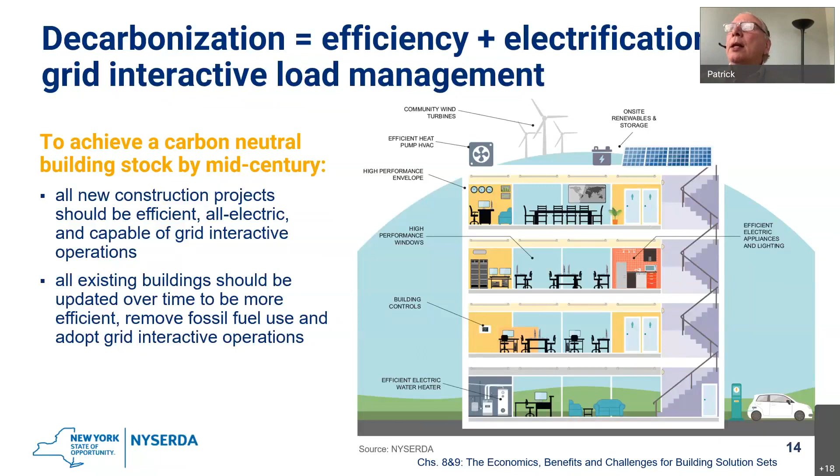Co-benefits, next please. I just want to run through some of the co-benefits of carbon neutral buildings here. Six key non-energy benefits, and I want to make a specific point on a few of them. Number one, you're able to future-proof your building. Your building would be safe against the changing energy market and the expectation that fossil fuels will become less accessible and more expensive over time.

Secondly, you can maximize usable square footage. The electric HVAC equipment generally takes a smaller footprint than existing fossil fuel HVAC equipment, and there are unitized solutions where you can combine multiple pieces of equipment into a unitized solution. Number 3, health benefits. We've mentioned some of the health benefits. There are studies going on right now that really show that these all-electric buildings are much better for people who have asthma and other related diseases.

Increased resilience. Weatherization plus solar and storage helps keep the power on and temperatures consistent in the event of a power outage or extreme weather event. Occupant comfort. High-performing building envelopes combined with engineered ventilation systems provide much more comfort than a typical building in New York State at this time. And safety. Reduced risks associated with the aging gas infrastructure. Open flames are eliminated with induction cooktops, and all in all, a large number of co-benefits. Next.

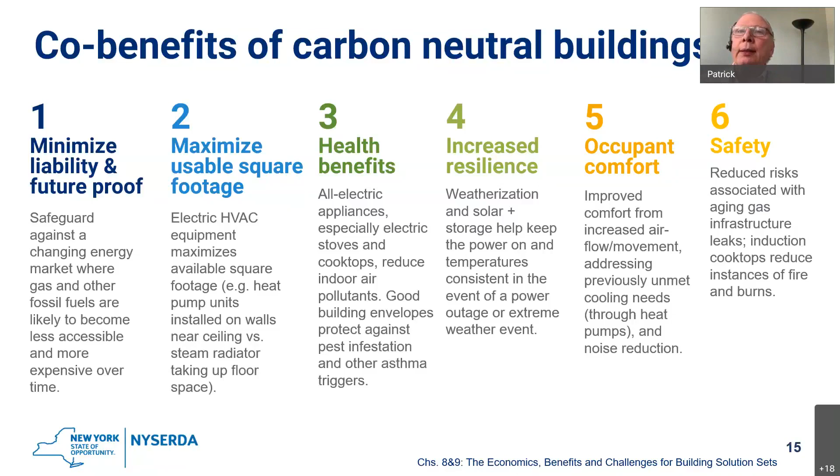There are some challenges. There still is a first cost premium compared to fossil-based fuel systems and a high cost of envelope upgrades.

Challenge number 2, cost of fuels is still an issue: the relative high cost of electricity versus the low cost of fossil fuels.

Despite the rest of the challenges noted below, the cost data that we've modeled has been exceeded in the actual marketplace, and I'll show that later in the demonstration. We've been sponsoring a Buildings of Excellence competition for a couple of years, and experienced design and construction teams are beating these cost estimates. But challenges still remain.

One of the biggest challenges is to get New Yorkers to invest in their buildings at a level that they're not typically doing. That'll be part of improving the building stock overall.

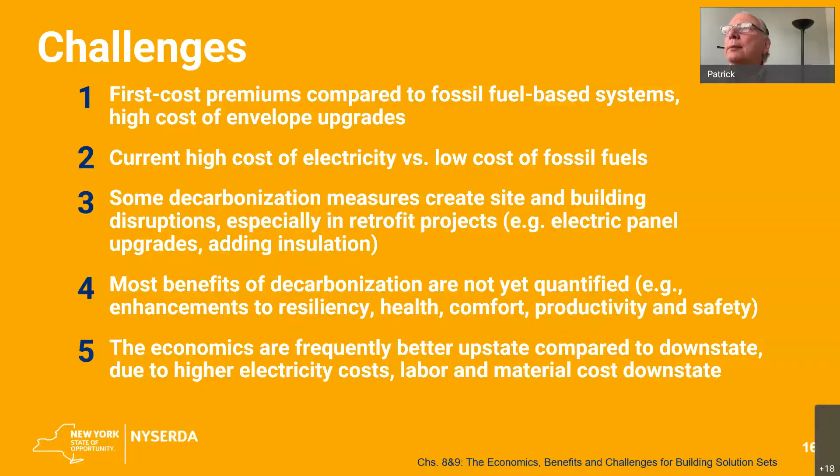Managing costs for carbon neutral solutions is critical, and we have multiple pathways that we are supporting to try to drive down cost.

The most effective way to reduce costs in new construction and gut rehab is by using an integrated design process with an experienced team, as well as ensuring pre-allocated design construction budgets to focus on right-sizing systems and minimizing material use. Costs are coming down rapidly, and advanced design teams are starting to report that they can deliver projects close to or with no incremental cost.

Some of the concepts used in other industries are just beginning to be applied to the construction industry: prefabricated panel solutions, economies of scale, and the establishment of a dedicated supply chain to support that. Improved familiarity with these systems can reduce the on-site installation costs and the time on site, which has a major benefit in terms of construction.

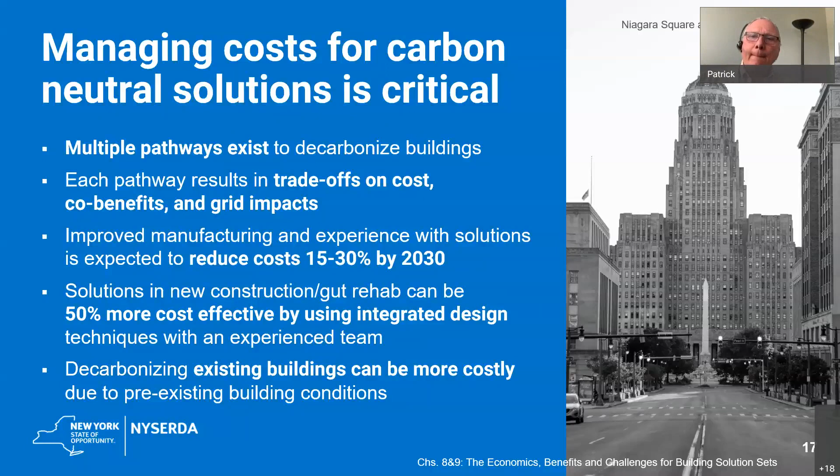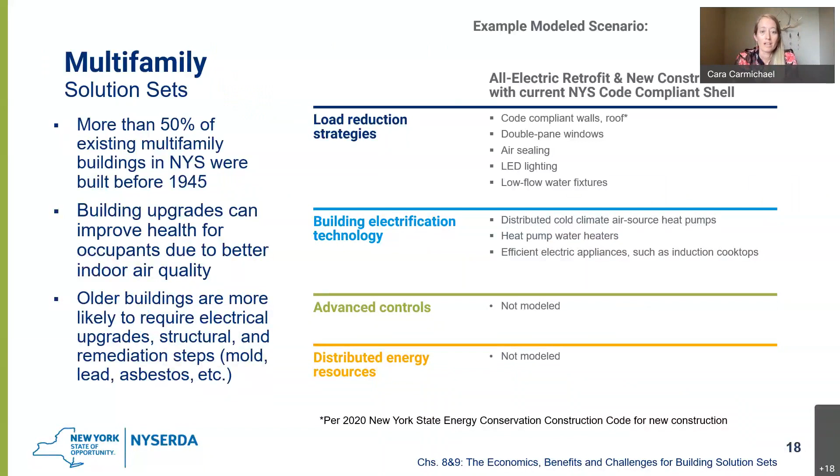We'll dive into the costs for the 4 key building types in the next several slides, starting with multifamily. For multifamily buildings, we evaluated an all-electric efficient scenario for both new construction and retrofits with gas and oil baselines. The multifamily building stock in New York is particularly challenging since most of it was built before 1945, and so naturally it has deferred maintenance that also needs to be addressed. But obviously this is a very important sector since it's home to millions of New Yorkers.

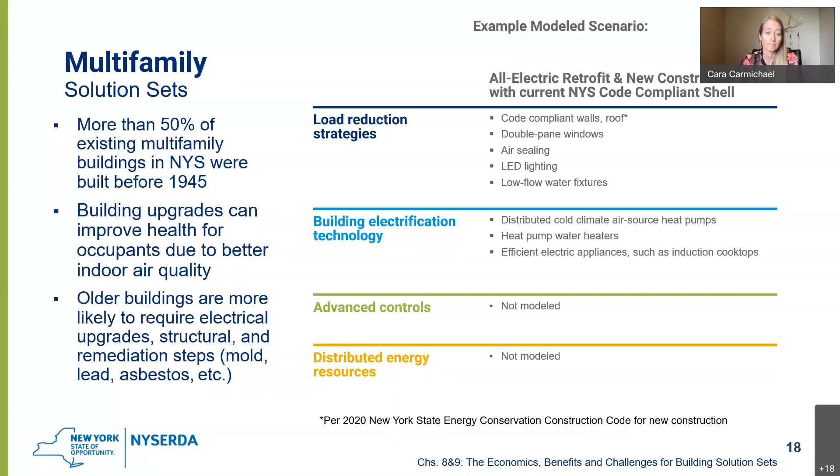Our analysis found that decarbonizing existing multifamily buildings that currently use oil to provide heat provides better paybacks than those that are heated with gas. So what we're looking at here is a 7-story retrofit downstate with a cold climate air source heat pump, a code compliant shell, a heat pump water heater, and efficient appliances.

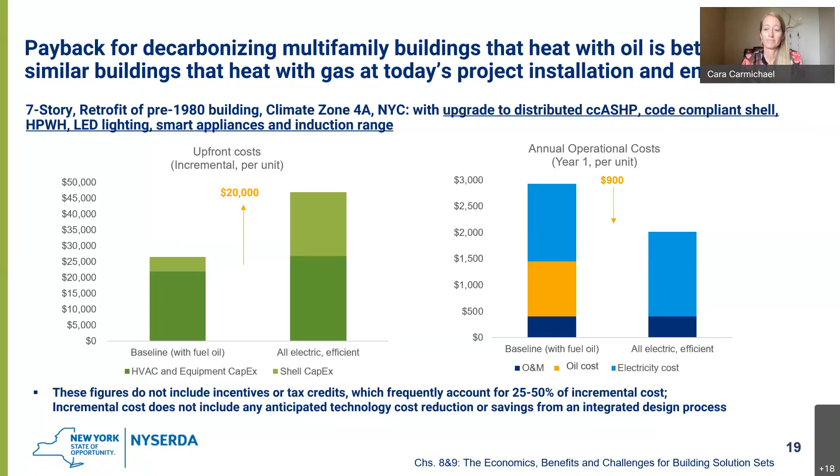In this scenario, with a multifamily building that heats with gas, our modeling shows that these are not attractive economically based on today's costs.

This does reinforce the importance of reducing upfront costs through technology cost reduction, like Patrick mentioned, and we discussed a little bit yesterday. And lastly, you'll hear it a few times today, but accounting for the co-benefits like health and comfort and resilience and the grid benefits is really critical. Again, health advantages are especially important with family members with respiratory issues, including asthma and allergies, and the societal healthcare costs due in part to our buildings impacts us all.

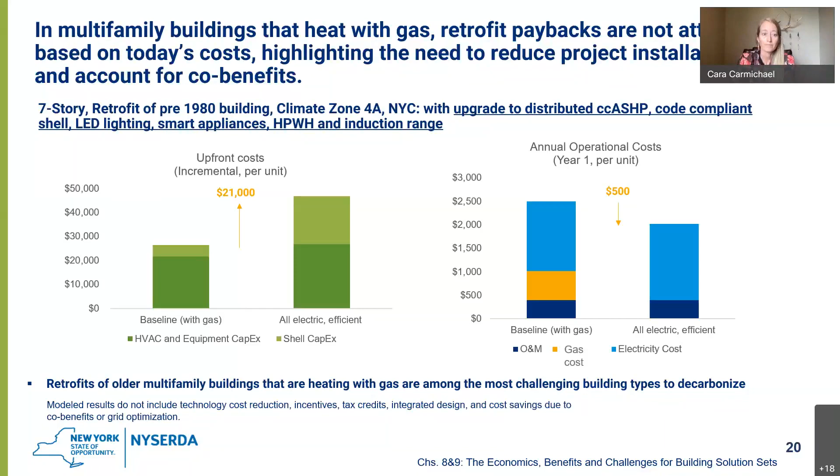As we have discussed throughout the roadmap presentation, new construction and gut rehab projects will have some of the best economics. This example is an efficient all-electric new construction scenario with a code-compliant shell, and upfront costs are nearing parity with conventional gas construction. We found only a small premium of about $2,000 per unit before incentives. This upgrade does increase operating costs, but just by a little bit. Overall, this is really good news for new construction multifamily decarbonization.

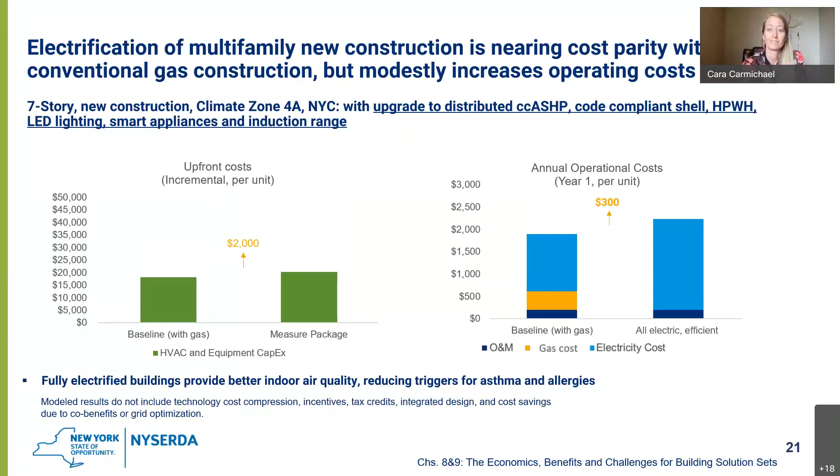Let me briefly explain the data in the slide you're looking at. We're showing the incremental cost as a percentage, both before tax credits and incentives—that's the current full cost—and then the incremental cost after available tax credits and incentives, shown in the lighter blue.

The data represented here comes from 2 rounds of the Buildings of Excellence competition that NYSERDA has been running. It includes low and mid-rise projects from upstate New York, and low, mid-rise, and 1 high-rise project from the New York City area. As you know, there's quite a difference in the type and cost of construction geographically within New York.

The great news is that a dozen of the projects have no incremental capital cost to build net zero and carbon neutral buildings. Last year's round of the competition, every building winner was an all-electric solution. That's just something to point out.

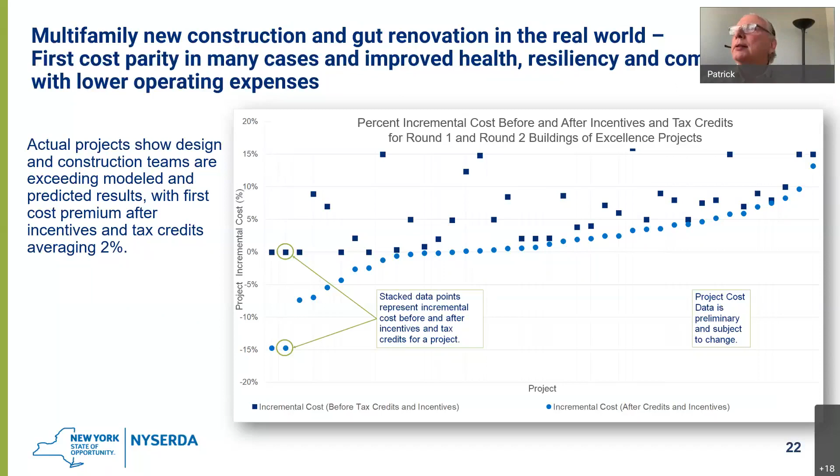With the Buildings of Excellence competition, in addition to the data, we get access to the design teams to understand the solutions they're applying that give them a combination of performance, carbon neutrality, and cost parity. One of the most important things is to begin early in the pre-schematic design phase, really looking at technical solution development and careful selection of the technologies deployed.

In addition to designing the building itself, it often takes designing how the building is constructed. This integrated design-build strategy is deployed by many of the teams. Notably, over half of the estimated project savings came from team and project design strategies, emphasizing the importance of a strong team that leverages integrative design. The buildings that achieved parity did not do so simply by putting more expensive equipment into a similar building design. I think that's important to note.

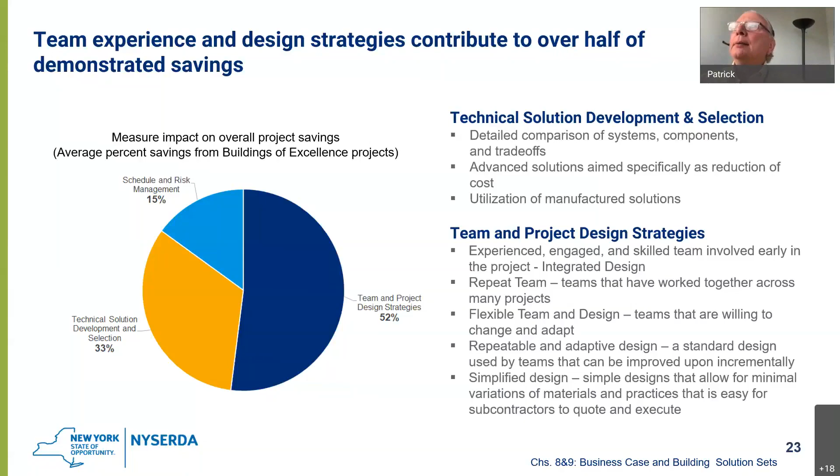There are many benefits to decarbonizing multifamily buildings, including improved health, comfort, resilience, safety, costs, and grid benefits. The biggest challenge with this building type will be decarbonizing existing multifamily buildings, in particular those using steam heating.

Also, some of the older building envelopes will be very expensive to upgrade and improve their performance. Another challenge we face in the multifamily sector, and in some aspects of the commercial sector, is the difference in incentives between landlords and tenants. When we have an owner-occupant or a homeowner, they share all the benefits of an investment into the building, but those benefits are split between landlords and tenants.

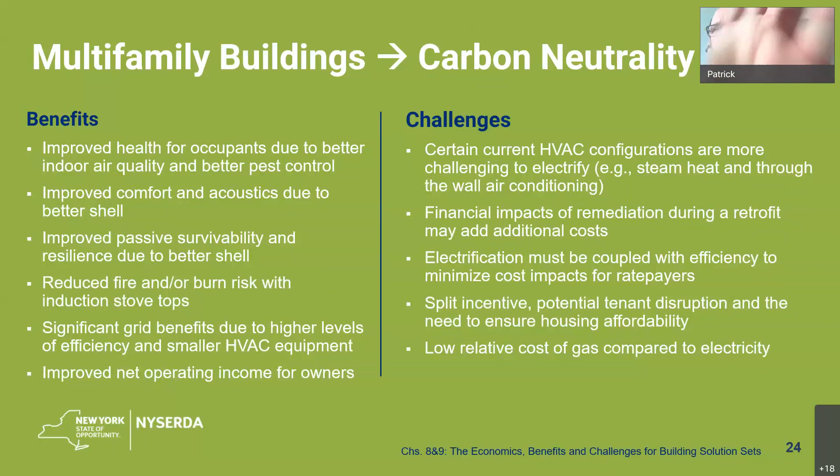The single-family home typology represents residential homes, duplexes, and townhomes that are common across New York. We'll look at 3 scenarios that include both air source heat pump and ground source heat pump technologies, and 2 levels of shell: a comfort shell and a more efficient code-compliant shell.

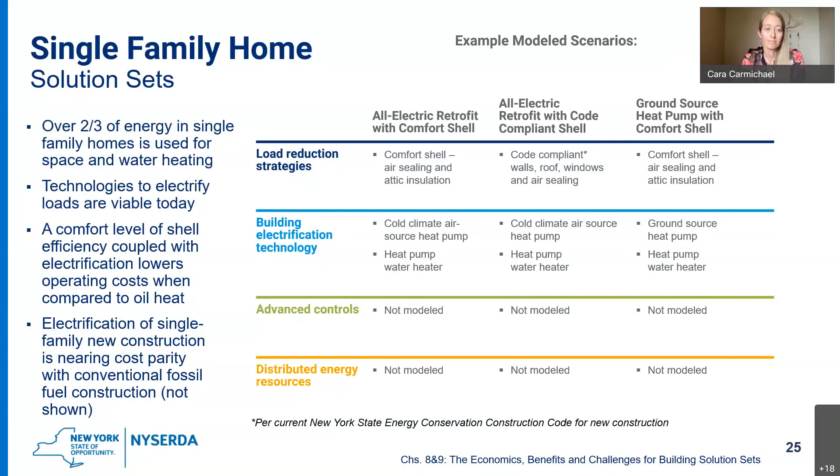Decarbonization retrofits of single-family homes with oil heat are often cost-effective today, even before incentives. We found that the average homeowner spends 10 years in their home, and the simple payback for this level of improvement falls under that threshold, making it a reasonable level of investment for most homeowners.

With the single-family home incentives available today, that could bring the simple payback down to 5 years. We found those incentives to be on the order of about $10,000. Lastly, this project will result in improved indoor air quality, better comfort, better resilience, and overall just a better place to live. If you're currently heating with oil, it's a very cost-effective upgrade.

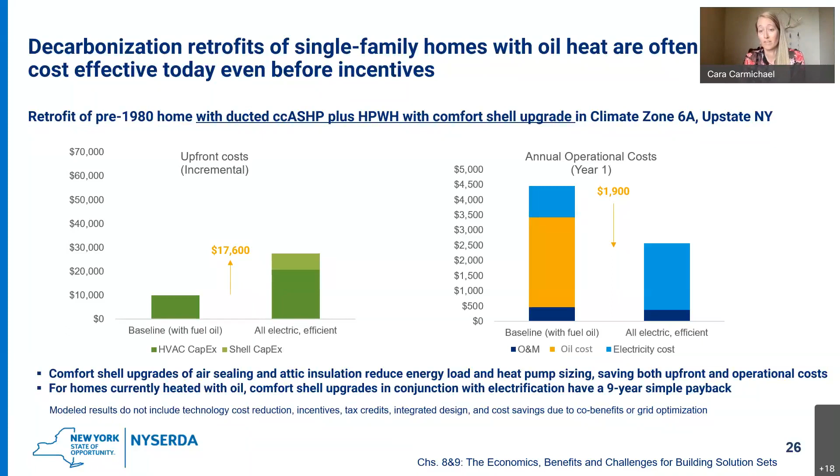There are 4 moving pieces that are not included in the economics shown here on the slide, but those will bring the cost down in the near term to help this scenario pencil. The first is incentives and tax credits, which, as we've discussed, could cut upfront costs in half. Second is the cost reduction of installed technologies, as Patrick mentioned and we discussed yesterday, installation, manufacturing, supply chain efficiencies. These we found range between 5 and 42% lower upfront costs for technologies by 2025.

The third piece is the increasing costs of energy, both gas and electricity, in the near future, which will make operational savings more valuable. And then the fourth, really important, is accounting for the co-benefits: health, comfort, resilience, grid benefits. These will all help make the business case. I would say it's also worth stressing that the economics are highly dependent on the existing conditions of the home.

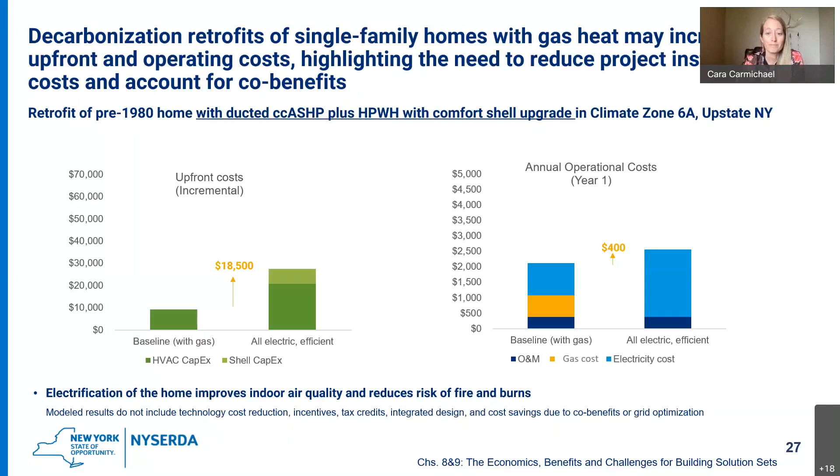As a result of this upgrade, the home will have superior indoor environmental quality. It'll have better comfort, better passive survivability, providing significant benefits to the family living there. One other really important dimension I want to highlight: with the deeper level of shell upgrades, this will reduce peak load on the grid, and this will also reduce grid build out, as Dan Ost presented yesterday.

This level of shell improvement would translate into a 50% reduction in peak load if the equivalent shell was rolled out across all homes, as compared to an electrified home with no shell upgrades. So the reduced capacity requirements on the grid will reduce grid system costs that are borne by all ratepayers, borne by you and me and all of us here today. Electrification and efficiency and shell measures are really important, not just at the building level, but also at the system level.

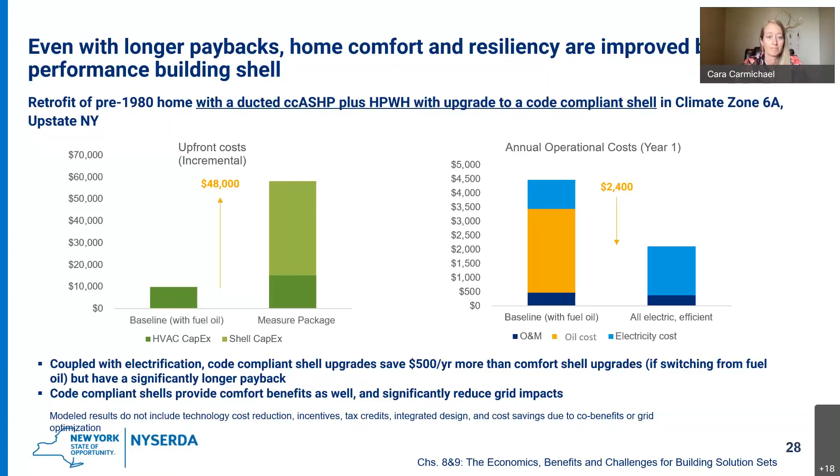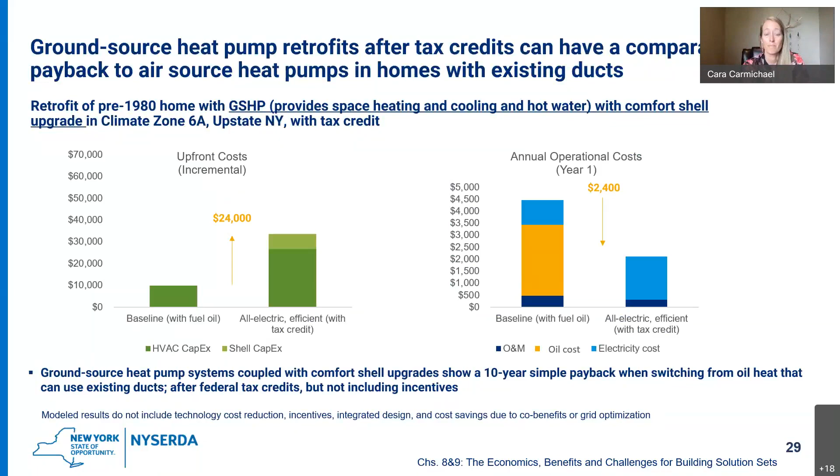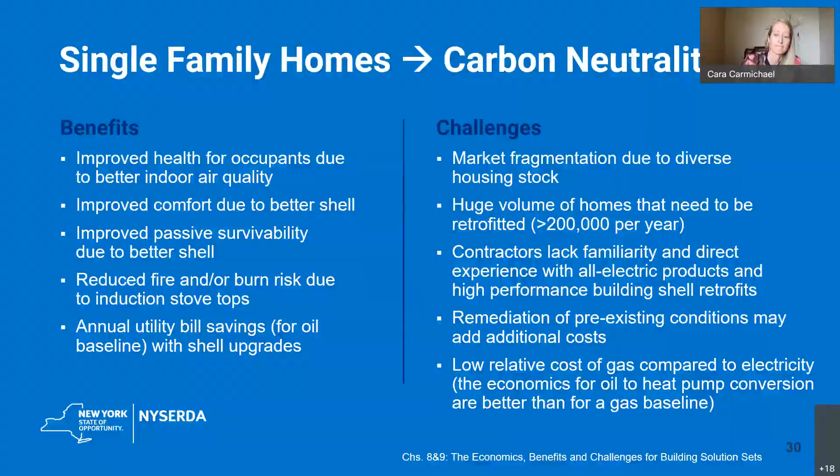The next set of slides, we're covering a few office use case cost scenarios, which apply to both leased and owner-occupied offices. We'll walk through two use cases, both retrofits: the first showing an all-electric upgrade with a code-level shell, and the second showing an all-electric upgrade with a passive house-inspired shell and advanced controls.

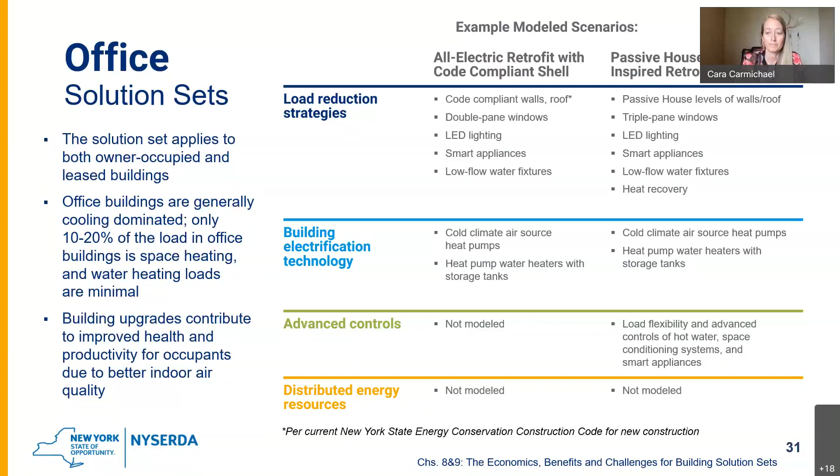The shell measures are driving most of the upfront cost increase. This scenario assumes bringing a pre-1980 office building up to current code levels of efficiency, which requires additional insulation and window replacement—not insignificant, but it provides important comfort and productivity benefits. The improved shell and equipment efficiency are responsible for almost all of the operational cost savings we're seeing. Without the shell upgrades in an office scenario, utility costs would likely increase since electricity is more expensive than gas on a relative basis.

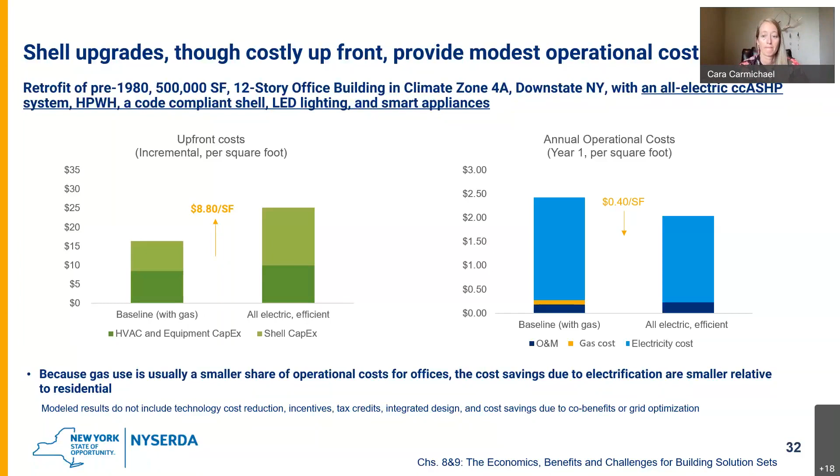I would also note that office buildings have a higher cost to retrofit to passive house levels because they have more glazing, more windows, a higher window to wall ratio than other typologies. Office buildings are also by nature internally load driven, so they're less influenced by a high performance envelope. So the bottom line is that without incentives, cost reduction, or targeted market demand, it may not make financial sense to retrofit an office building shell up to passive house inspired levels.

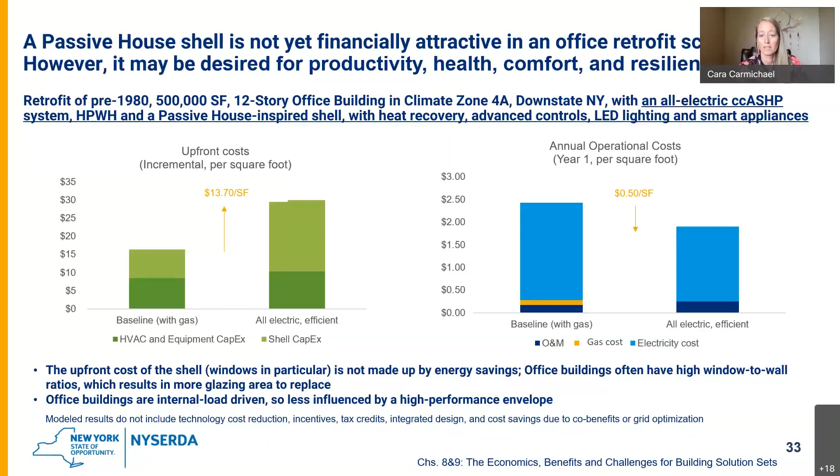To summarize the business case offerings for office buildings, studies have shown that net zero energy buildings can provide strong returns to developers and landlords, including a 3 to 7% higher occupancy rate, 3.5% higher rental rates, and 13% higher sale value. While we have less data on carbon neutral buildings, we believe they'll result in similar returns, if not better. It's also important to note that tenants and occupants gain the benefits of improved health, comfort, resilience, and productivity.

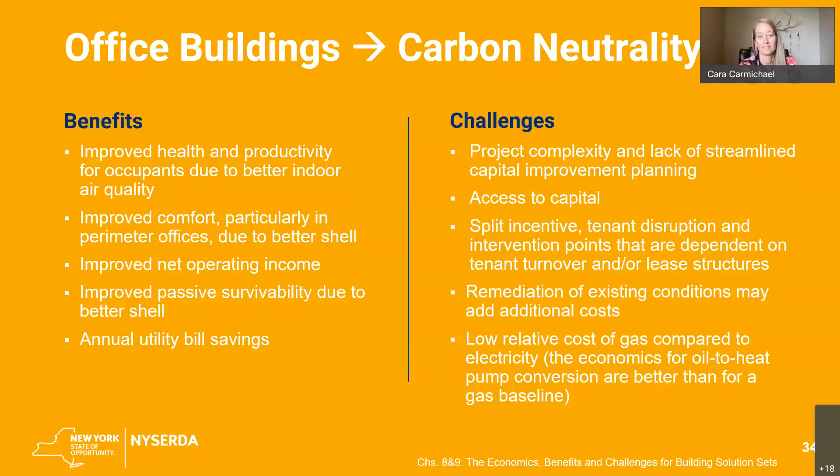I'll walk through two scenarios on higher education buildings, both new construction, one with a code compliant shell and the other with a passive house inspired shell and advanced controls. Improvements in higher ed buildings are often driven by aggressive sustainability goals. What's most unique about this typology is that buildings are often integrated into a campus-wide energy infrastructure that serves many buildings at once, as Greg spoke to yesterday.

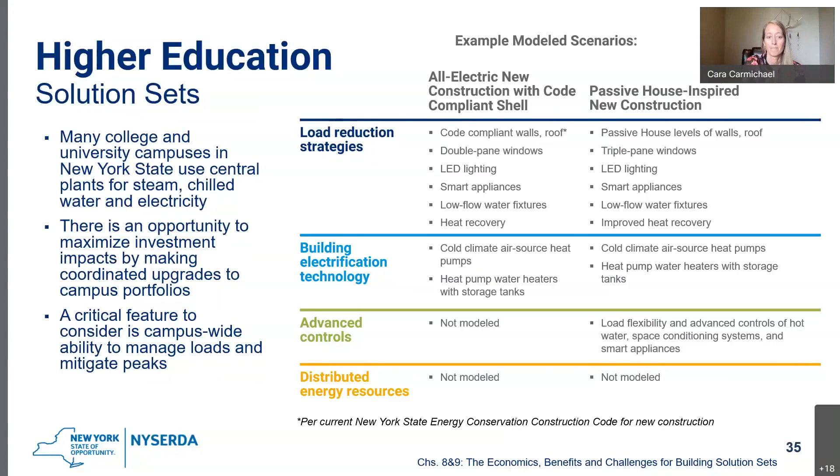All electric new construction has minimal incremental upfront costs and less than a 7-year payback. Given academic institutions often have long asset holding periods, this is really promising. If we pan out to the total project cost, the premium for this upgrade for an all-electric efficient new building is less than 1% of the total construction cost. This ends up being well below the typical range of contingency on a project and should be a really strong investment.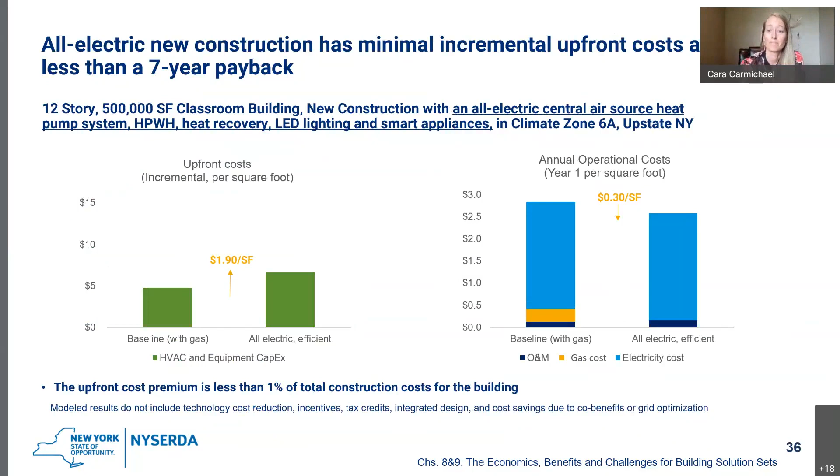For passive house inspired new construction, the upfront premium is slightly higher, less than 2% of total construction costs. These measures, before incentives and tax credits, would result in less than a 20-year payback. According to the Energy Information Administration, the median age of educational buildings is 37 years, so this could be a viable investment. Compared to offices, the energy demand of a classroom is less driven by internal loads, so in this use type, higher levels of shell performance are more beneficial than in office buildings.

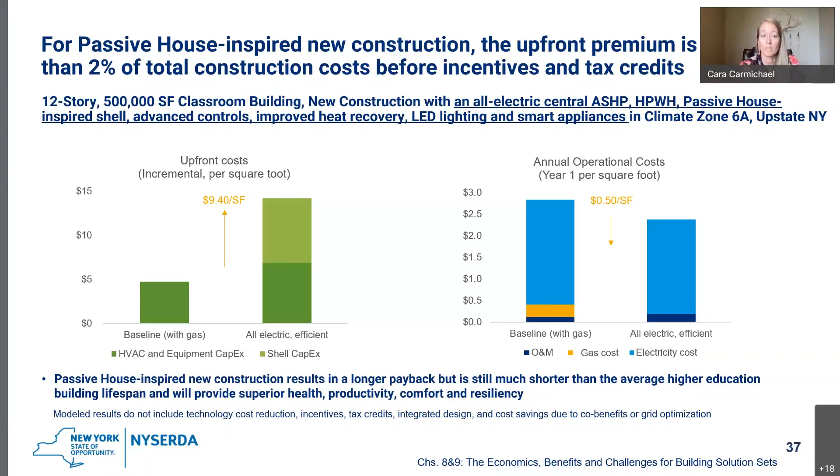Next slide, and I'll pass it back to Patrick. Thank you, Cara.

In closing out the section on higher education, I want to highlight a few top-level challenges and opportunities. Beyond the classroom and dorms, many campuses have central steam plants and specialized high-energy buildings such as laboratories. These will be challenging to decarbonize given today's electrification technology and the costs. At the same time, the research, curriculum, and engaged students at these campuses will provide many downstream benefits in both the professional lives of those students and their civic lives.

NYSERDA is currently funding a number of projects through our Energy to Lead and Rev Campus Challenge, and an interesting project related to this area is just starting at Syracuse University with some World War II era dormitories. Next slide, please.

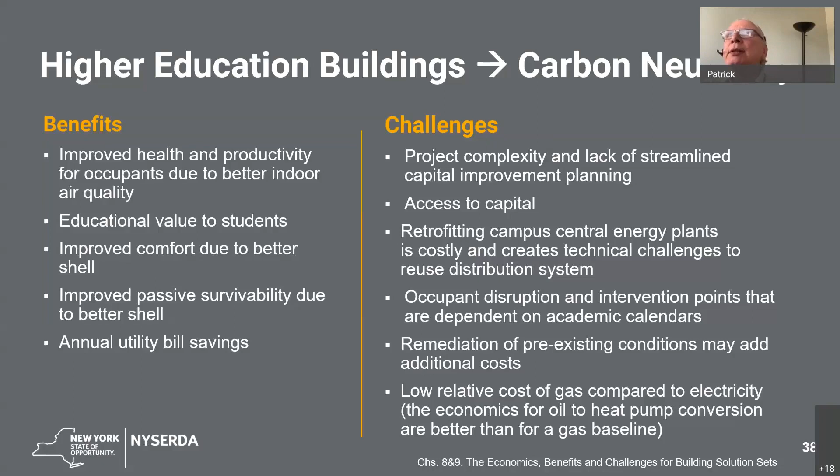In summary, we already have better buildings for occupants and cost-effective ways of combining heat pumps with improved building envelopes to produce new and retrofit decarbonized buildings. As the applications of ground or water source heat pumps improve in cost and flexibility, we will use more of the latent energy in the earth and water resources to service more of the winter heat load and help balance grid load and cost.

From the demonstrations previously covered, we see that innovation in building and construction design can reduce the cost of achieving a high-performance building envelope and reduce the sizing of equipment needed for heating and cooling. As knowledge and experience is shared, we'll be able to achieve carbon neutral at comparable costs in many building types and projects. Work is still required to achieve the scale that will dramatically lower installed costs.

That work includes driving consumer awareness and demand, investing in supply chain and applying world best technologies in New York, removing regulatory barriers and mitigating other risks associated with new approaches, providing incentives, tax credits, and low-cost financing to support more of this work being realized on an accelerated basis.

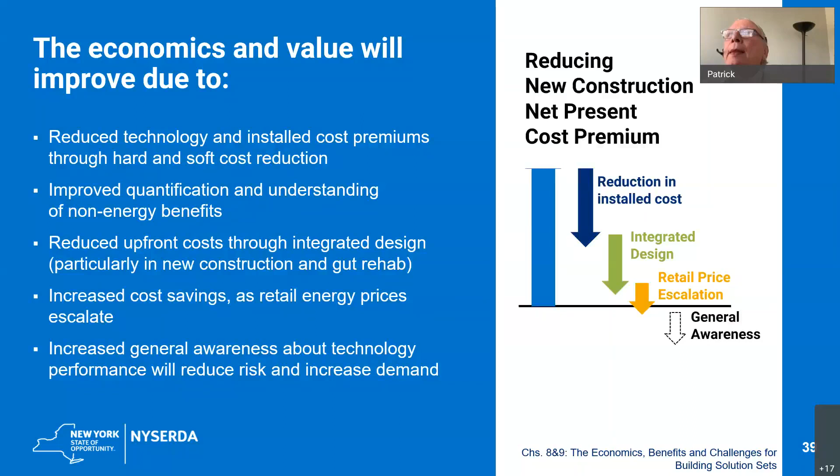Additional opportunities to enhance the value proposition include exploring financing options and ways to develop business models that bring or use low-cost finance for their products. This would include service models for providing thermal energy, monetizing the co-benefits like reduced healthcare costs associated with occupying a carbon-neutral building or being in a carbon-neutral neighborhood, future-proofing buildings so that they will be reliable, resilient, and optimized for a smart, renewable grid. Share back the grid benefits and cost avoidance created by efficient, smart, and flexible buildings.

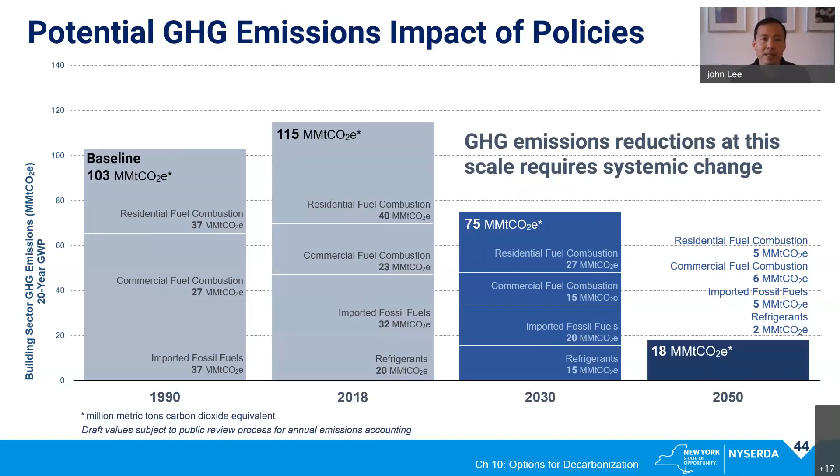The most transformative strategy uses codes and regulatory standards to send a clear market signal, ending reliance on fossil fuels in buildings, phasing in over time. Legislation must be enacted to adopt building codes, equipment standards, and regulations to improve energy efficiency, electrify buildings, reduce emissions, and enhance building resilience. This will take a committed public to support these legislative, regulatory, and programmatic changes. And while these changes will not be easy, without these clear regulatory signals for the market, we will not achieve our critical greenhouse gas reduction goals. These regulations will drive the scale and certainty needed to transform the market and reduce costs.

First, we must adopt a highly efficient state energy code. We need to simply stop wasting energy. Codes should incorporate low carbon resiliency solutions, which include on-site solar photovoltaics, readiness for advanced electrical equipment and batteries, readiness for electric cars, and the capability for major energy-consuming appliances, batteries, and cars to run and charge in coordination with the utility. Ultimately, we need to move to an all-electric code for new construction, starting in 2025 for single-family homes.

And by 2030 for multifamily and commercial buildings. The state codes should prohibit gas and oil equipment for space conditioning and hot water in all new construction and gut rehabs. The technologies to do this for new construction are commercially viable today.

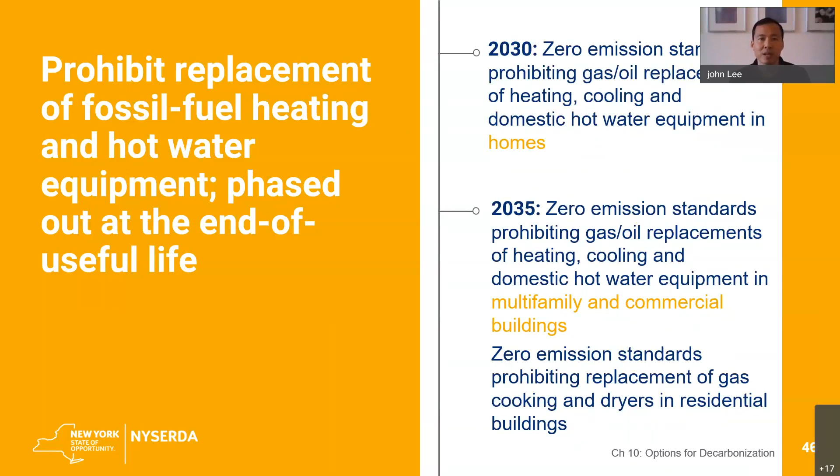For building owners today, better information in the market drives better decisions. The merits of requiring the measurement of building energy use and making that information available via disclosures have already been proven in major real estate markets, including New York City.

The state should launch a statewide energy benchmarking and disclosure program as soon as possible, requiring owners of large properties to annually report overall energy usage at the building, greenhouse gas emissions, and water usage.

Within a few years, owners would need to disclose energy consumption data prior to sale or lease, starting in 2025 for large buildings, and periodic energy audits to further understand the energy efficiency and greenhouse gas mitigation opportunities specific to every large building.

And by 2027, sellers of single-family homes would provide energy performance characterizations or ratings like the Home Energy Rating System or Energy Star at points of sale. These ratings can work in parallel with other standards for health and well-being that also result in low carbon outcomes.

All this information will inform future policies and improvements to energy programs, allowing us to reach our climate goals faster.

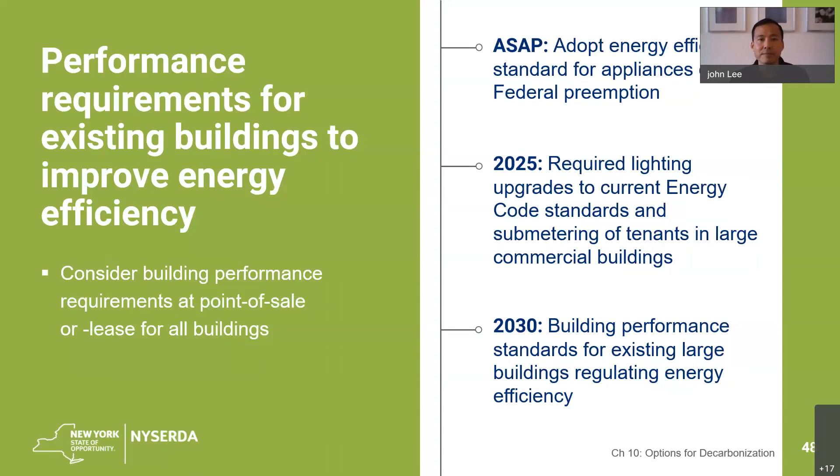Regulations send clear market signals, and given enough time for technology development, job training, professional development, and supply chain growth, the industry and service providers can respond to educated consumer demands.

In the quantitative analysis that demonstrates that nearly 85% emissions reduction in the building sector by 2050 is achievable, the majority of the emissions reductions is attributable to the electrification of heating and hot water systems as a modeled market response to regulatory prohibitions on replacing fossil fuel equipment.

In decarbonizing buildings, policymakers and regulators need to advance a managed, phased, and just transition from reliance on fossil fuel gas and the gas distribution system to a clean energy system, including elimination of embedded subsidies for fossil fuel gas, and we need to start this now.

This transition demands careful technical analyses and difficult decisions, and likely will need to play out over several years. With long-term planning and careful phasing, we can potentially mitigate the risks and costs of stranded assets in the gas system.

New York is at the very beginnings here, along with California and Massachusetts, in opening a gas planning proceeding under the Public Service Commission, which will drive toward a transparent gas system planning that aligns with our broader energy and climate goals. Despite the speed at which this transition needs to happen, this warrants careful, inclusive, and phased long-term planning with attention to safety, reliability, and affordability of service, understanding end user impacts, investigating options for reducing or repurposing the physical footprint of the gas system, and exploring alternative business and regulatory models for gas utilities in the long term.

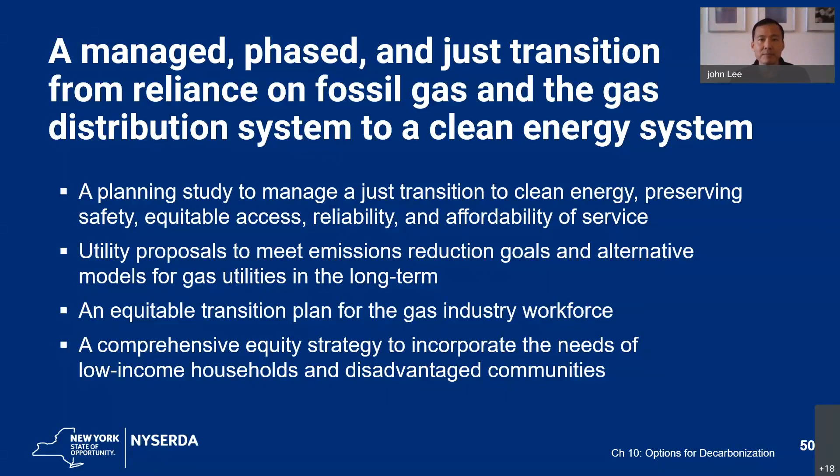The public sector and utilities need to be phasing out incentives for fossil fuel gas equipment. We need to ensure that up-to-date, transparent information is available around grid readiness down to the building level so that building owners can plan to go fully electric.

We've done this for solar in terms of mapping out hosting capacity, and utilities should do something similar for building electrification. We can make gas hookups less attractive by eliminating the 100-foot rule, which spreads the cost of new gas hookups across the rate base.

There are several corresponding changes that will need to be considered in the public service law. We will also need to examine low carbon options for the New York City Con Ed district steam system.

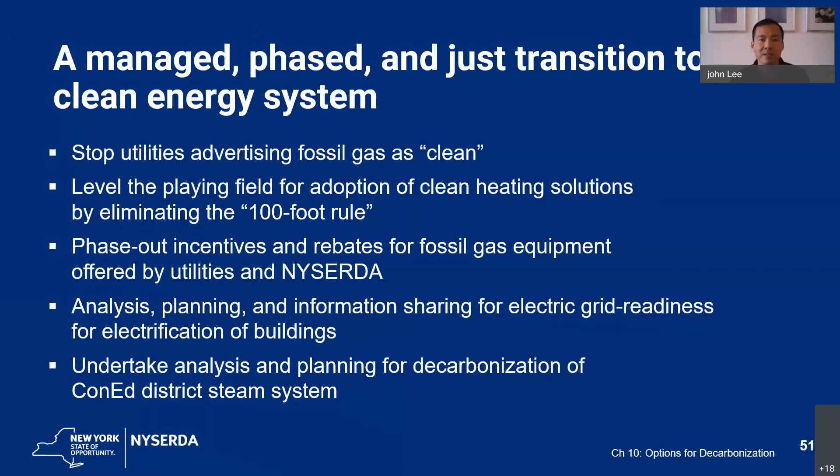HFCs are potent greenhouse gases, which are used in refrigeration, air conditioning, and heat pumps, and in spray foam insulation. These HFCs currently account for 20% of the total GHG emissions from buildings. Fortunately, our federal government, other states, and the industry also are working to drive toward technologies that use alternative refrigerants that have much lower climate impacts.

It will be challenging to get this done in the rapid time frame we need to meet, but by aligning New York State policy with other leading states and the federal EPA, we can send a strong signal to the industry while mitigating costs. We need to update the New York State codes to allow low global warming potential refrigerants.

We have to require reclamation or destruction of refrigerants at end of life. Critically, we will need to make changes to the existing Department of Environmental Conservation refrigerant rule to drive towards new low and ultra low global warming potential technologies, aligning with federal policy.

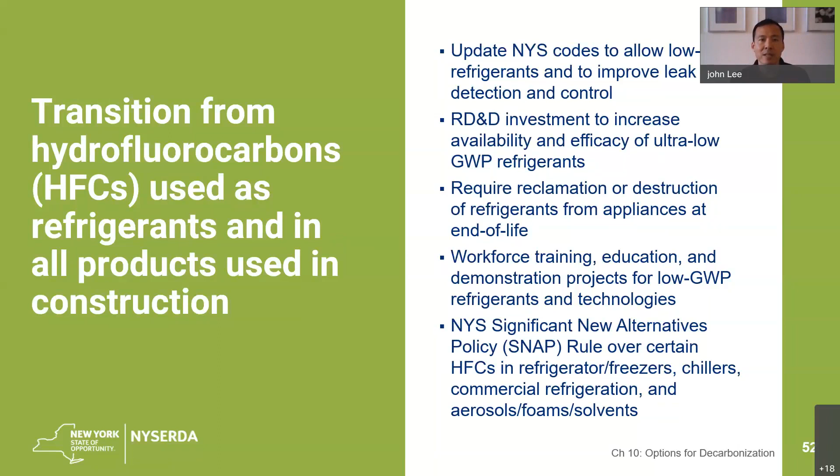Moving the market to decarbonizing buildings in a very short period will require new funding. Through the efforts to decarbonize buildings, we can improve housing quality and expand economic opportunities for low-income households and disadvantaged communities. At least $1 billion annually in funding is needed for incentive programs supporting building upgrades that serve low and moderate income households, affordable and public housing, and disadvantaged communities on an ongoing basis to avoid the risk of disinvestment.

Likewise, we need to prioritize training and job placement. While there will be costs associated with this transformation of our building infrastructure, the potential for new economic opportunity is even larger. Moving forward, we will need to expand incentives to speed the uptake of building efficiency, electrification, and decarbonization retrofits for at least the next decade through federal and state tax credits and direct cash incentives.

We will also need to create direct cash incentive programs for electrical service upgrades to offset the cost of preparing a building for electrification, similar to the electrical vehicle make-ready program. We must support and accelerate efficiency, electrification, and resilience in public housing across the state.

In addition to NYCHA, there are over 30,000 units of public housing outside of New York City, which house many of the state's most vulnerable residents. We need to identify and fund retrofits and electrification of these buildings and resiliency centers that provide safe refuge, backup power, and community spaces to coordinate this during disaster relief.

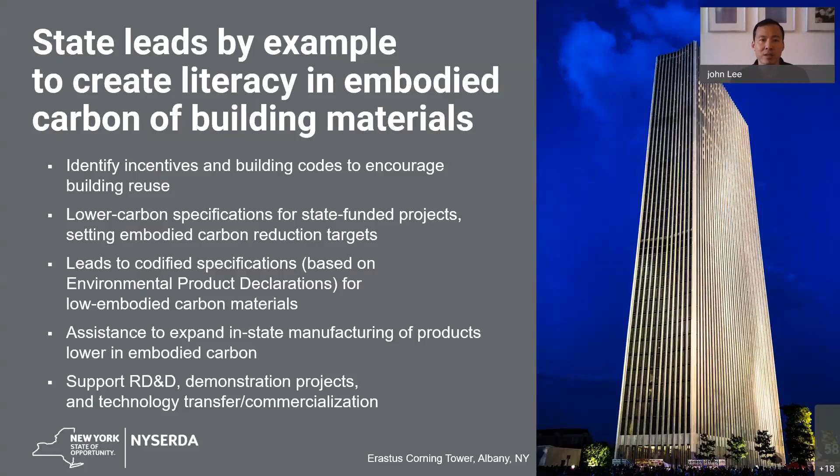Change at this scale and making it happen to advance equity will require new resources. This is an economy-wide undertaking that requires coordination of private capital and public resources. Climate change is a global problem, and the changes we can make start at the local level as we continue to advocate for federal resources and policy support. We also need ongoing Public Service Commission attention to rate design and retail rate price signals for electrification and building to grid interactivity.

These policies will yield vast improvements in the way we build new construction, but will also have a profound impact on existing underperforming buildings. With building improvements and new equipment come increases to asset value and lower operating costs to the building owners. The business case for decarbonization in commercial properties continues to make sense, especially as more commercial tenants align corporate sustainability goals with their direct operations within buildings.

Within residential buildings, the benefits of decarbonization are obvious, with increased property value, improvements to health, and operating cost savings to residents and owners. However, the upfront costs are high, particularly in older buildings with long deferred maintenance. Any policy that may be pursued that would impose a building performance standard to compel energy efficiency improvements in housing must also come with incentives to mitigate the risks to affordability.

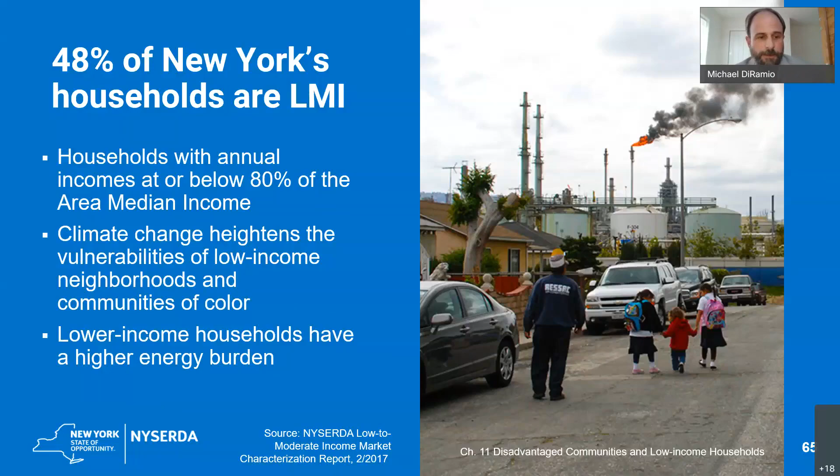While the strategies will need to evolve over time, we are looking to begin advancing decarbonization of low-income housing as part of an early stage market development, given there are unique building typologies and barriers that will take years to solve. The barriers this sector faces, I'm referring to low and moderate income housing, include not just the cost of energy upgrades, but also the cost to address deferred maintenance issues related to health, safety, and structural soundness of buildings. For electrification, this will also include electric service and distribution system upgrades as well.

These issues can be even more complicated for renters, where there is a split incentive to make upgrades between the building owner and the tenant.

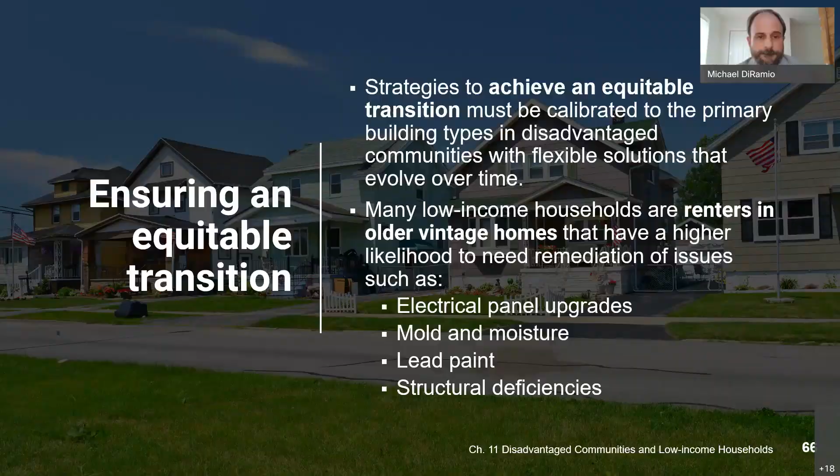Our four-part approach to this sector is about driving engagement and development of LMI housing, or low to moderate income housing, with the needed subsidization while leveraging private investment to scale solutions. We're working to do this in a way that engages local communities as part of a long-term endeavor to achieve a just and equitable transition.

First and foremost, we must be careful to reduce the possibility of increasing the energy burden from building decarbonization efforts on already vulnerable households. To this end, electrification must be done in combination with efficiency standards and upgrades. By adding in renewable energy, including rooftop solar and storage, as well as through grid interactivity and demand flexibility, we will lower the need for dirty peaker plant operations even further.

Second, there are a variety of issues to address based on the nature of the building stock. LMI housing is not homogeneous. It includes subsidized housing of various kinds, as well as naturally occurring affordable housing, and everything from manufactured homes to large multifamily buildings. We will continue to expand the variety of building types targeted over time and based on available technologies and the regulatory context.

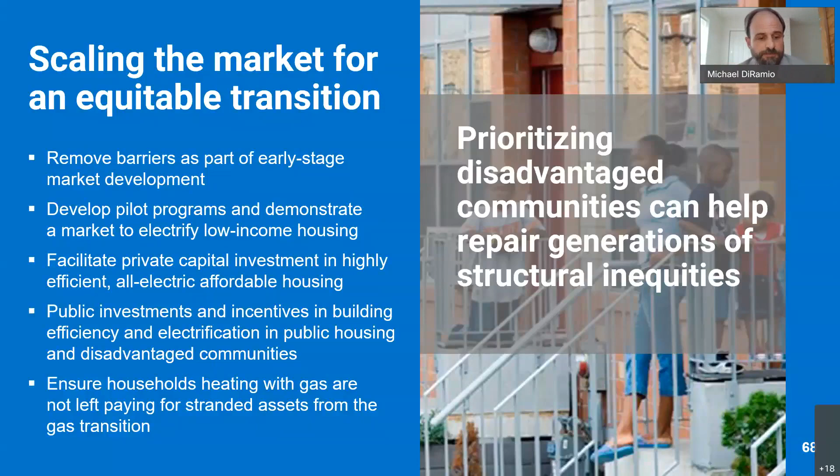So in terms of benefits, the goal of maximizing economic benefits to LMI households and disadvantaged communities starts with reducing energy costs, or what's referred to as energy burden, which is the percentage of income paid towards energy. But that is just the starting point.

As we are focused on improving quality of housing in disadvantaged communities to provide greater comfort and value to those that have lived for too long in often underinvested or disinvested housing and communities, the work to decarbonize affordable housing over the next 20+ years will create tremendous economic opportunity for these communities.

So we will prioritize training and jobs and workforce development in disadvantaged communities and for priority populations in those communities. The focus on early adoption of retrofits and new technology in these communities will help ensure that disadvantaged communities are part of the first wave and all subsequent waves of economic investment, so that they too can reap the benefits from the full economic investment timeline in order to grow local businesses, build local wealth and the value of their homes, and help make the clean energy transition equitable.

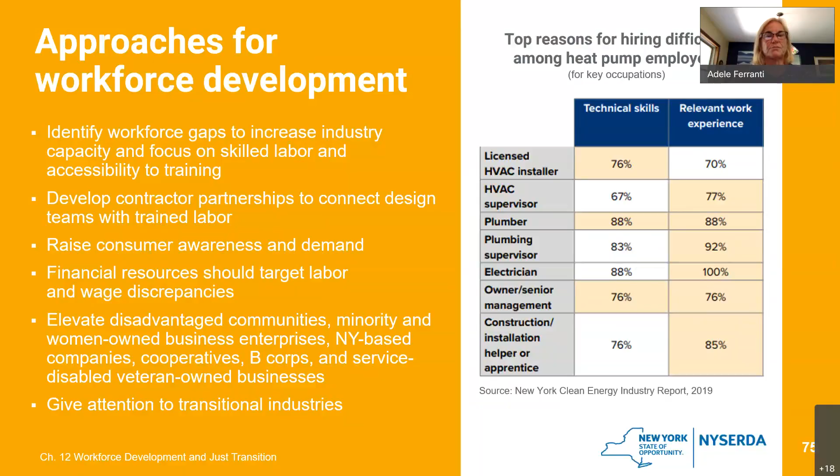So again, thinking about a just transition and equity, while fossil fuel industry workers are a particular area of focus for us, we want to ensure that all workers have the opportunity for training and employment in the clean energy economy. For transitioning workers, we need to assess current and transferable skills, look for opportunities to advance those skills or retrain those workers. Sometimes we need to provide training while they're still working so they're prepared to move into a new job without any gaps.

We also need to assess current wage, hiring, and labor practices and help transitions to new clean energy jobs. As we think about residents of disadvantaged communities and opportunities to prioritize and elevate those residents, we're looking at support for disadvantaged communities, environmental justice zones, opportunity zones, support and growth in the area of minority and women-owned businesses and contractors, service-disabled veteran-owned businesses, to ensure we have diversity, equity, inclusion considerations addressed as we expand the workforce. And for people with additional barriers to employment, we really need to provide wraparound services, such as help with job searching, developing resumes, interviewing skills.

Sometimes we need to provide funding for transportation. That seems to be a very big barrier, transportation costs, childcare, and even proper work tools. I think in some programs we've even bought steel-toed boots so people can enter into the clean energy economy.

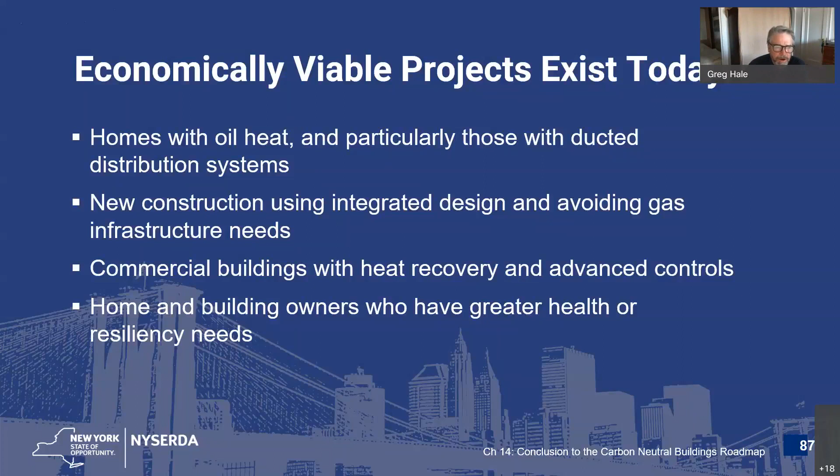Next slide. We talked about technology, the ideas of where we should focus. The key is to focus our RD&D investment on technology that have the best prospects for cost reduction and impact—in other words, scaling potential.

I'd like to emphasize the need for NYSERDA and New York State to remain abreast of global decarbonization technology advances that are promising for adaptation to New York, like some building retrofit and decarbonization strategies we're seeing in the Nordic countries, the Netherlands, and other European countries. NYSERDA's Empire Buildings Challenge, a current program, is focused on demonstrating some of these technologies for high-rise buildings, and we'll see what projects get launched under the first round of that challenge later this year.

We also have Retrofit New York working to adapt and scale the Dutch Energiesprong model for retrofitting existing buildings to net zero performance. And like we've mentioned, refrigerants and methane are very intensive greenhouse gases over a 20-year time frame and then dissipate. A technical point here is that the Climate Act requires that carbon accounting utilize a 20-year time horizon, so methane and refrigerants will start taking on a substantially larger role and urgency in the discussion.

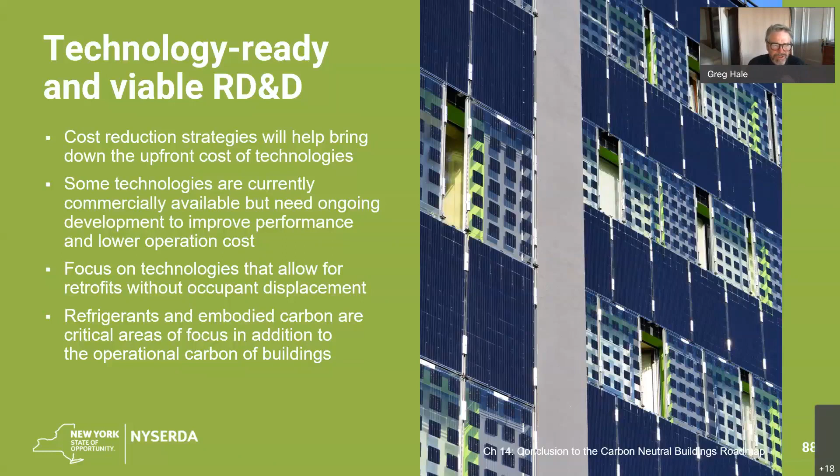I've also emphasized the importance of demand flexibility to reduce impact on the grid. Buildings are part of a system. The system is buildings, the grid, electric and gas, and transportation. They all need to work together, so it requires systems thinking. How do we optimize the impact of electrification on the grid, which is all about reducing peak demand and local grid constraints through load flexibility, storage, and controls? Very important focus area for research and development.

But if we think back to the solution set modeling, you heard Kara remind us that various envelope improvement measures for existing buildings do not necessarily appear to be cost effective to building owners at current cost points. But those slides also noted that the modeling does not consider the benefits of those envelope improvements to the grid and the reduction in expense of expanding the grid that they could lead to. So given the fact that better envelopes will reduce the cost of grid expansion, shouldn't we be working with the Public Service Commission and Department of Public Service to develop some process to utilize a portion of those grid benefits to help pay the cost of these envelope measures? That's what we mean when we say we've got to monetize the co-benefits.

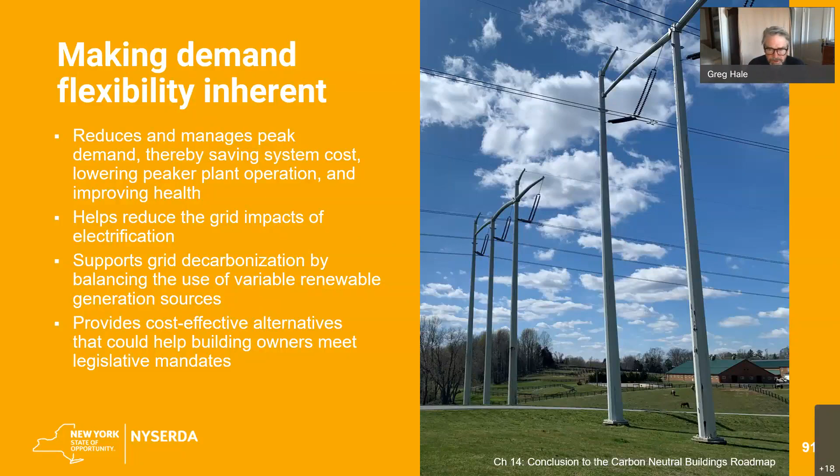So where do we go from here? As we've said, this is a long-term plan, a long-term document. This is the first iteration. We will have future iterations coming relatively soon in the next few years, focusing even more on embodied carbon and the refrigerant issue. Likely candidates for typologies for the next iteration to focus on: K through 12 schools, big box retail, warehouses, hotels, hospitals. And we also need additional focus on skyscrapers, restaurants, commercial kitchens, grocery stores, and a number of other building typologies.

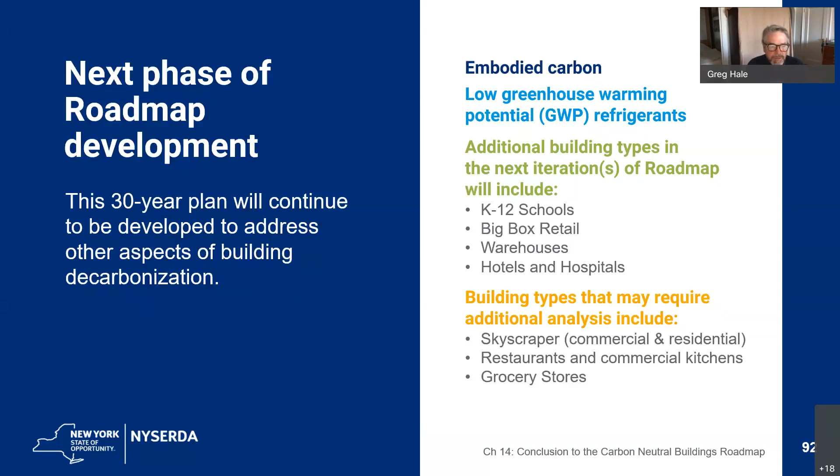So this is one of my favorite pieces here, some case studies. This isn't science fiction, this is happening today. It's happening all around the state. We only have time to mention a few of these buildings, but they're retrofits, they're new construction, they're gut rehab. It's already happening, and I'm hearing about new projects every day. Some of whom really didn't even know that NYSERDA was around, or that these incentives were available, and they're just making the decision to go this route because the economics demand it.

So here are a few of these.

Let me just stop and check. Am I hearing that my sound is off, or am I good? You're good, you're good, Greg.

Okay, thanks. Well, back to the case studies. So let's just look through a few of these. Each one of these could be a 20-minute presentation, but I'm going to go quickly. And I would also note again that these are only a handful of examples. We've had 42 Buildings of Excellence Award winners, only a few of those projects involved in this list today.

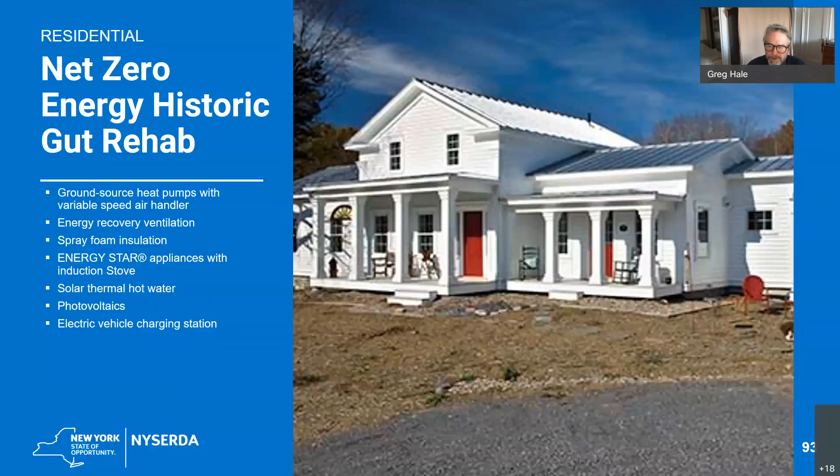You see some of the results of this. They got to a point where, and this is an upstate farmhouse, the average monthly utility bills are $18, which is really only paying for a connection charge to the grid. And the owner's return on investment, and this is indeed after incentives, but their return on investment on the solar and hot water system is 16.1%, and the geothermal system is 10.9%. So these are cost effective in certain cases today.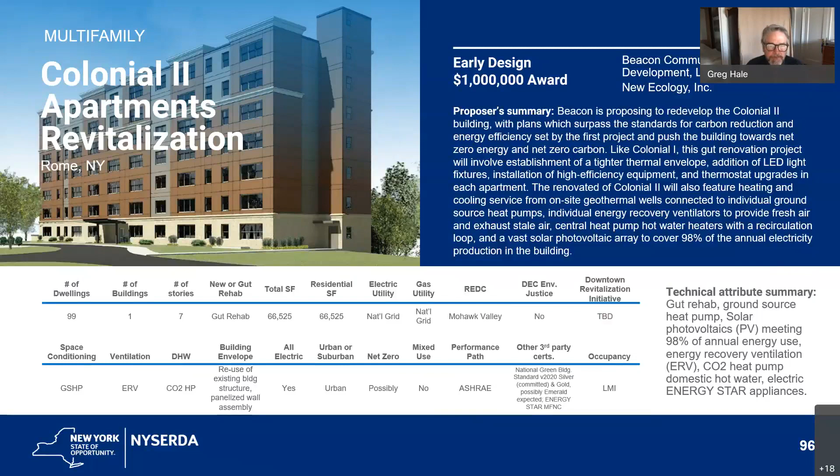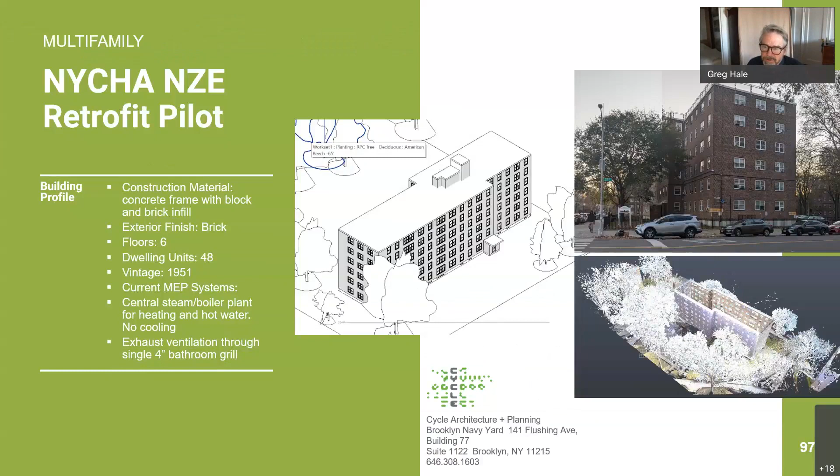So this is an interesting pilot, I mentioned this yesterday, where we're working with the New York City Housing Authority on a net zero energy retrofit pilot. This is a Retrofit New York team providing technical assistance, but the funding is coming entirely from NYSERDA. They want to figure out how to take their existing buildings and turn them into decarbonized, comfortable, attractive places to live.

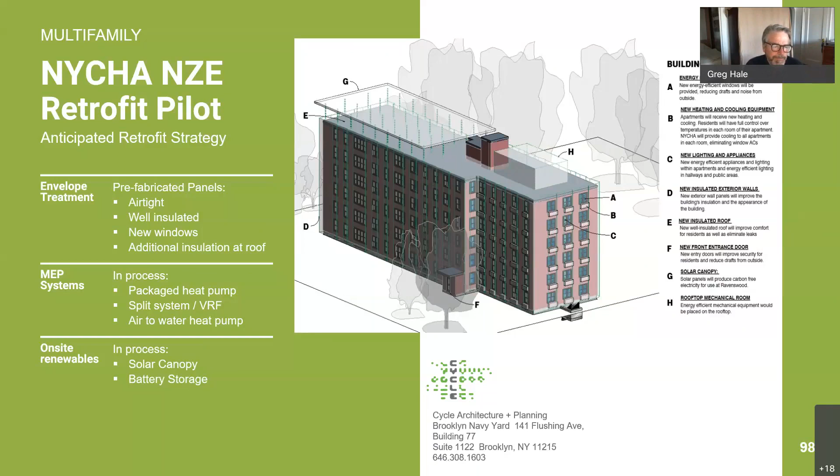This is a new construction project in Albany, again primarily affordable housing. They're going for triple net zero, meaning energy, waste, and water. It will be a very exciting project.

A little bit more on this one: it will be net zero, all electric, and fully modular construction. So this is kind of next generation thinking happening today.

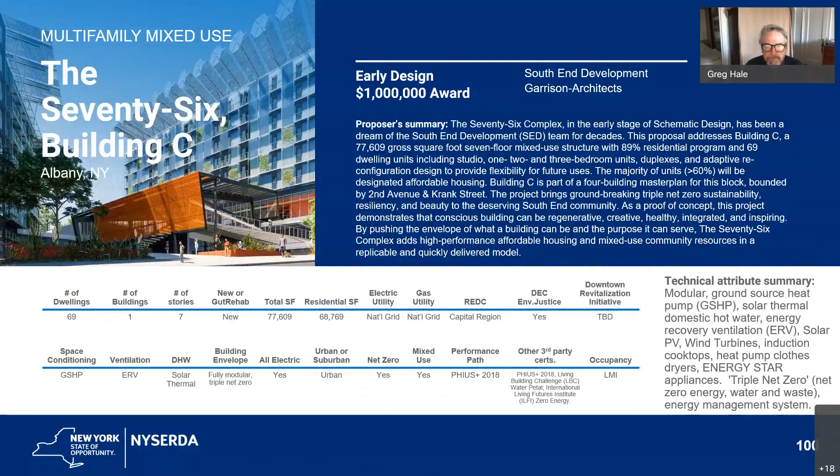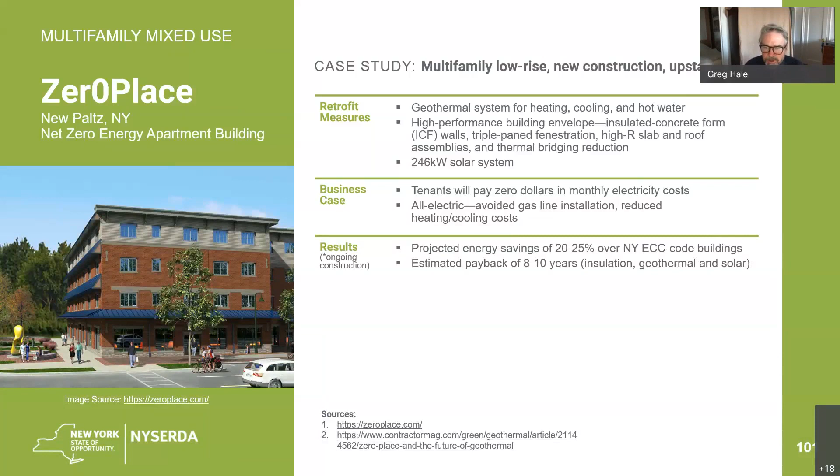Here we have another new construction, this one multifamily low rise, upstate in New Paltz. They expect tenants will pay $0 in monthly electricity costs, with projected energy savings of 20 to 25% over code compliant buildings, and an estimated payback of 8 to 10 years. That one also used a geothermal system.

One or two more here and we'll wrap it up. This is one of the projects out of the first round of Retrofit New York: Casa Pasiva, an affordable housing project in Brooklyn run by RiseBoro. It's using an exterior insulation layer, so it's done with residents in place. Went to all electric space heating and cooling, running conduits down through channels within that EIFS exterior insulation to bring heating and cooling to individual units.

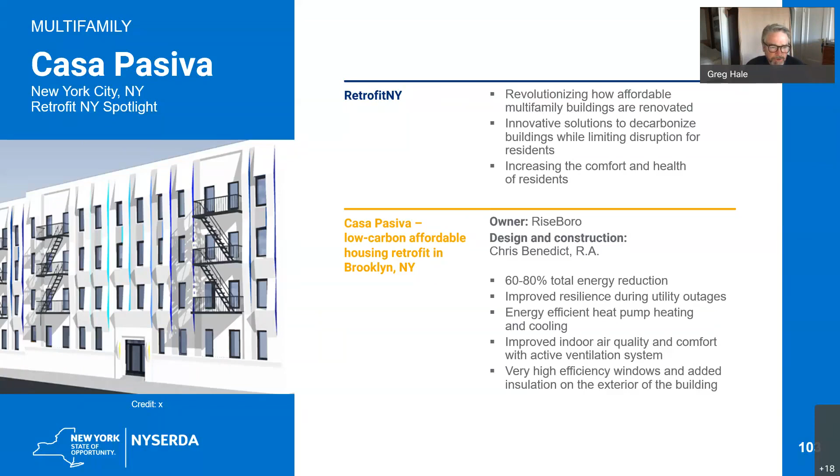Yeah, so this is a small office retrofit, upstate, going for net zero with solar arrays. Simple payback period of roughly 2 years for all of these measures. Again, just showing how cost effective it can be today.

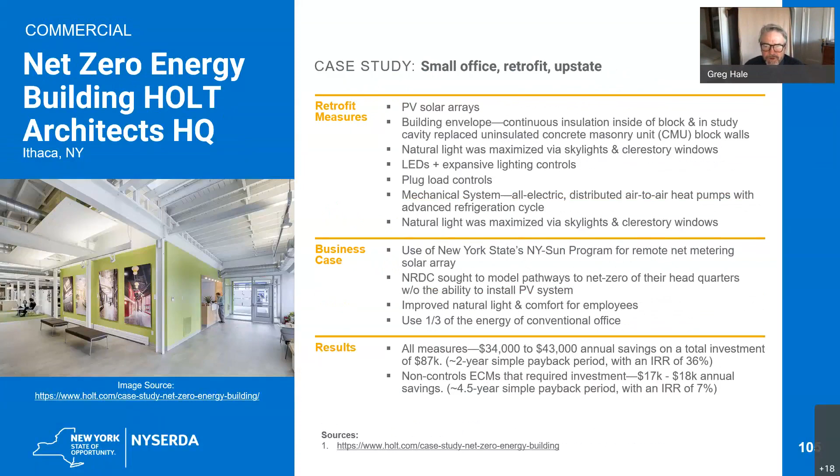Like I say, I could go on and on with these case studies. We could run through another 50 of them, but I don't have time for that. It's showing you that it is achievable today and needs to become the business as usual process of tomorrow. So with that, I will wrap and turn it over to Matt.